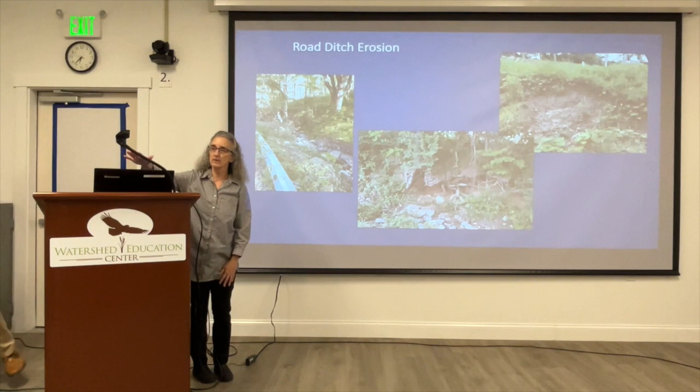So, yeah, put a camera here. Can you see me? I'm so short, so I don't want to stand there. You're like, yeah, who is that? Well, actually, you would know who that was.

So this is a road ditch erosion, and this actually is connected to a grant that we have put in. It's about almost $1 million, and it's going to service the towns of Conesus and Sparta and the town of Geneseo. And the reason it's up here is more for the fact that we have this kind of erosion along our roadsides, but it's nice to be able to pair it with something that we can do. One of the reasons why we can do something here is because it's affecting public infrastructure.

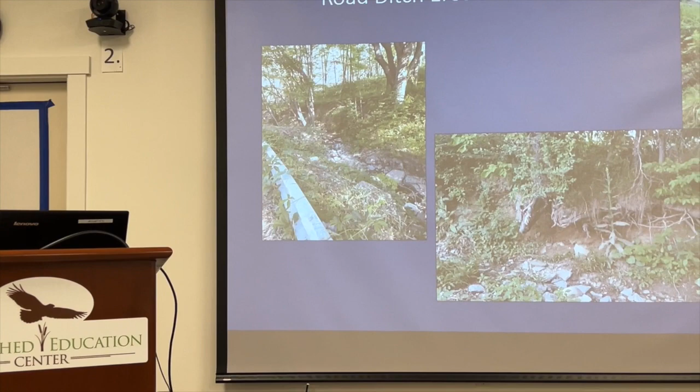So our WQIP grant, which is water quality improvement grants, is connected to stabilization of, in this case, town infrastructure, which is town roads. So in the town of Conesus here, Joy Road, and the town of Sparta, this is Story Road, and in the town of Geneseo, this is Long Point. And you can see we've got road impacts. These are all road ditches. So we're looking forward to getting into that grant 2023 to 2024. Thank you, Mary.

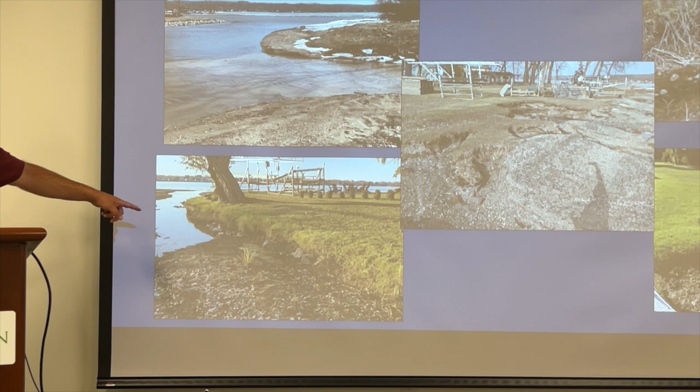So here's great examples of some stream bank and shoreline erosion. This is a property on, is it North McMillan? It's not. Is it North McMillan? To be honest with you, I'm cheating in the middle of the screen. I don't remember. I think that's what it is. So this property is just washing away. It's at the mouth of the creek. Anytime there's a large storm, it just washes more.

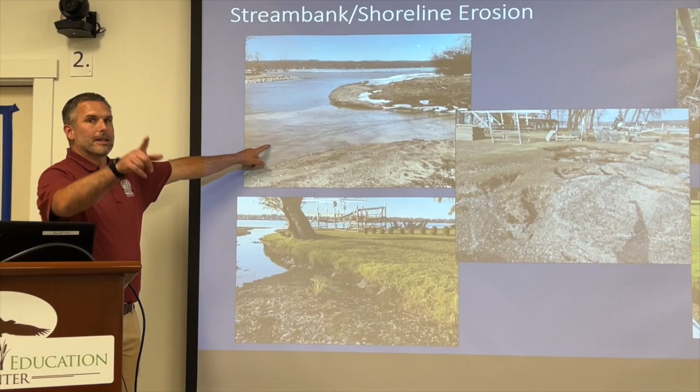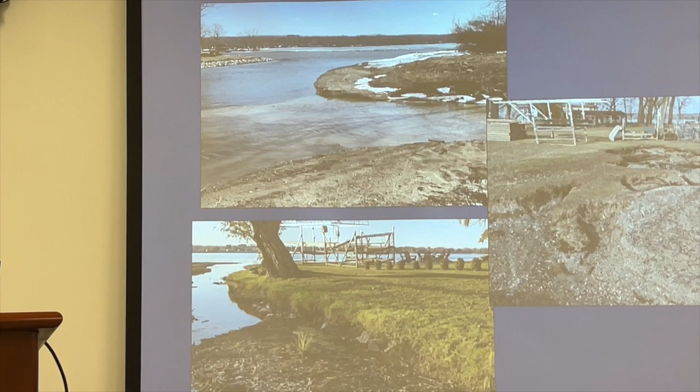This is a really good example of what tree roots do. It might not be super easy to see, but it's holding all of this land together. This is right over here at Hannah's Creek. There's a large deposition of sediment that goes along the outlet that's going to need to get removed at some point. This is down on Long Point, to the south of Long Point Creek. When we had those big floods, the water just swirled and washed away all the waterfront.

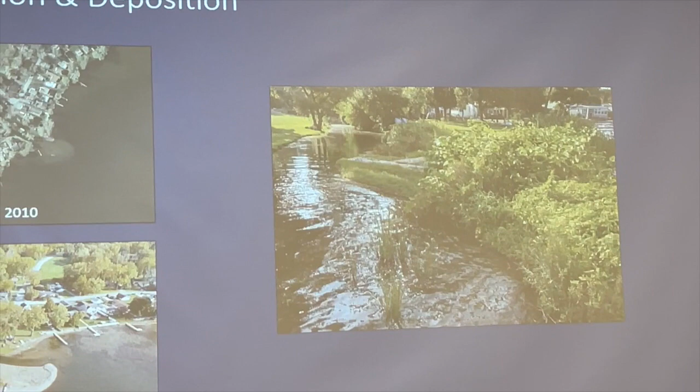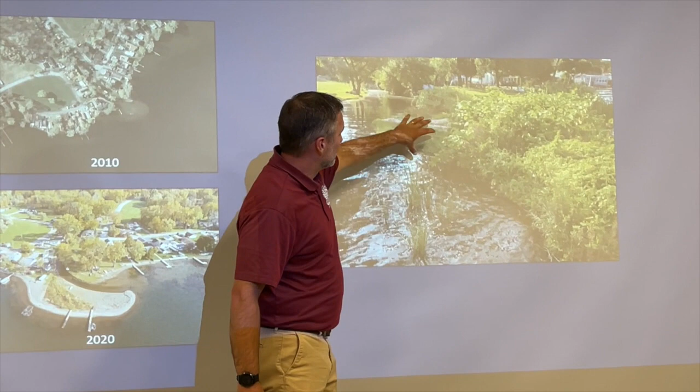And then that's another example in the upper right of some stream bank erosion. The homeowner's land is just being cut away. Here's some really good aerials of what happens with all that sediment being deposited. So down here, it's being deposited at the end, and so these folks over here are starting to lose what they have of a shoreline, and other people are gaining. Same thing up there. This land didn't used to be there, and now all that sediment is being deposited. Plants are growing up on it, and it's just gonna stay there and cause issues for the folks on the other side.

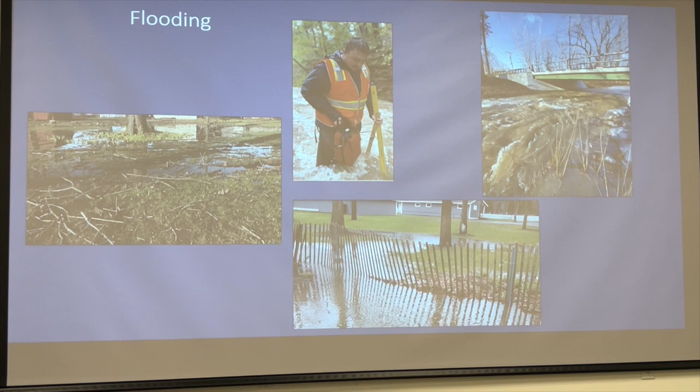And then here's some photos of flooding out on Long Point Park. And that's a SUNY Brockport student doing a stream flow study on North McMillan Creek, which is up there in the upper right-hand photo as well. So like I said, all these are caused by natural events. Most of them, I guess, some could be caused by humans. I don't have any great answers. I can just pass along resources to folks. And this is where Megan comes in and can tell us about what we can do.

So again, thank you for having me. My name is Megan Webster. Mary already introduced me to you. Just another bit, as I mentioned, I grew up on Cuba Lake and witnessed a lot of the things that you see on Conesus Lake as well, firsthand growing up, and now in my role as a district manager for soil and water. A lot of the projects we do are dealing with stream banks and shorelines and how we look at making them more stable and robust for our future.

So I know that you all are, since you're here, very aware of our changing weather patterns and our increase in weather events.

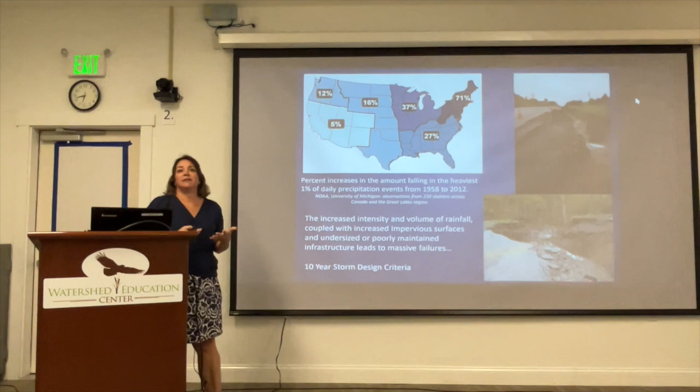And if I move that, is that going to be problematic? It's fine. Okay, great. I'm going to move in front here. It's just easier.

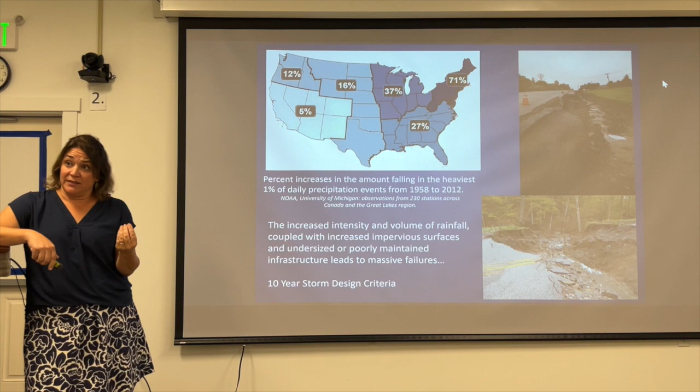So, as you see from the chart here, we are increasingly seeing more water coming at more concentrated events. And so these are more intense storms occurring over a shorter period of time, a lot more water being seen. When I go out to a site visit, the number one thing I hear is, it never used to be like this, okay? And that is, in the cyclical way, somewhat true.

We are exiting about a 10 to 20 year drought. And so we're moving out of that drought cycle into more water. In addition, we're seeing the changes of climate where an increased temperature in our atmosphere allows more water to be held in the atmosphere, right? So more water up in our atmosphere then is able to condense and fall down in much greater volumes in

shorter periods of time. And the days of maybe a light, gentle rain for 6 hours over the day doesn't happen anymore, right? It comes in very short bursts, very intense amounts of water over short periods of time. And your neighbor down the road 2 miles away might not see any rain, and you've gotten 2 inches. And so this is something we're seeing across the board throughout our region.

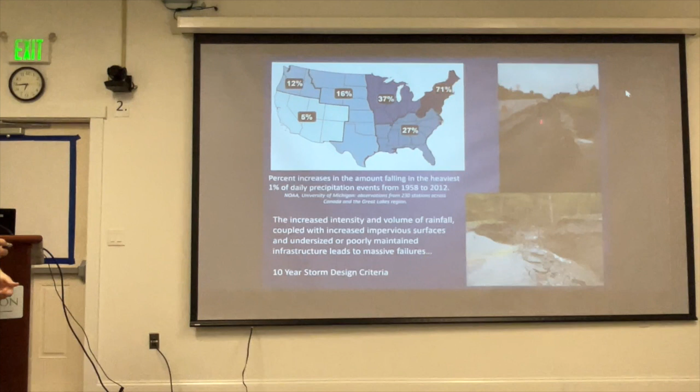And you can see here, just a few examples of when major rainstorms happen, the washouts that occur, whether it's along a roadside or this is a blown out culvert that then took the road with it. And as I mentioned, the increased intensity and volume of that rainfall really has very dramatic impacts on our infrastructure, especially with undersized or poorly maintained infrastructure. So it's something that we have to deal with.

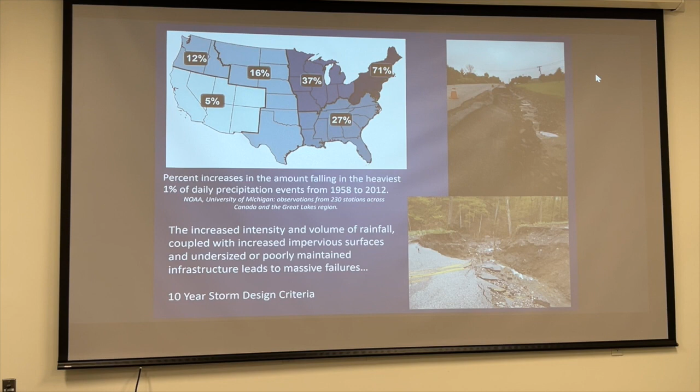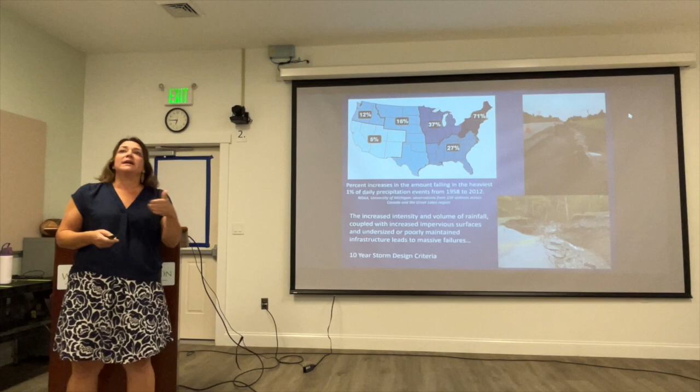Most of our public infrastructure is designed for a 10-year storm, okay? A 10-year storm, just to put it in perspective, is around 2 inches over a 24-hour period of time. When they say a 10-year storm, it's a probability thing, right? It doesn't mean that if you've had your one 10-year storm, you're not gonna have another 10-year storm for another 10 years, unfortunately, because over the past summer, we've had about four 10-year storms, okay? So it's just a gauge for us to give an idea about the amount of rain that we're dealing with over that period of time. And it's something that we use as a metric.

This is recently, obviously you might have seen this in the paper, the storm on July 8th. This is the town of Canandaigua that experienced a 1,000-year storm. We had 5.5 inches in 2 hours in the Canandaigua area. And obviously it led to massive flooding. We had over 100 homes damaged in Ontario County, and it was a very localized storm.

And in that region, we've had about 17 inches over a month period. So, it was already saturated soil, and then having this amount of rainfall come in behind it, there's no way that our public infrastructure is built to handle this type of thing.

So, we all know the consequences of these massive runoff events, or when infrastructure fails, or just general movement of soils through our system. Those soils and sediment and pollutants have a lot of impacts on our local waterways. And it's very, very difficult to clean dirty water. Okay, it's better to control it at the source so those pollutants and nutrients aren't entering our waterways. Once they're there, very difficult to clean. Very expensive to clean. So what we want to do is really focus on the sources of those pollutants and see how we can really control those.

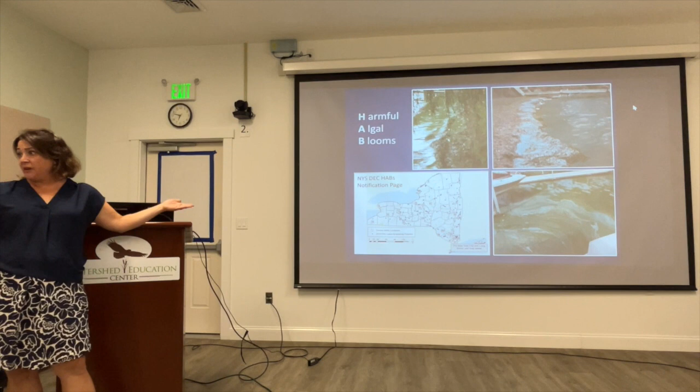You're, I'm sure, all aware of the postings page for harmful algal blooms. I know there's postings through Livingston County as well, so I'll leave that to Mary to share those resources later.

But I'd like to share with you, we are all part of the solution. So it's not just one area of society that is able to control this problem or solve this problem. It's not just agriculture, it's not just construction, it's not just homeowners. We are all part of this situation. We're living in a built environment, and as humans, we manipulate our area around us, right? So how can we do that for the positive and have positive effects that will help us live in the way that we're accustomed to?

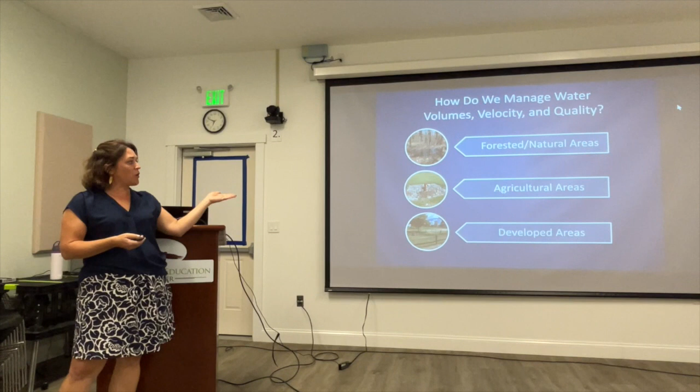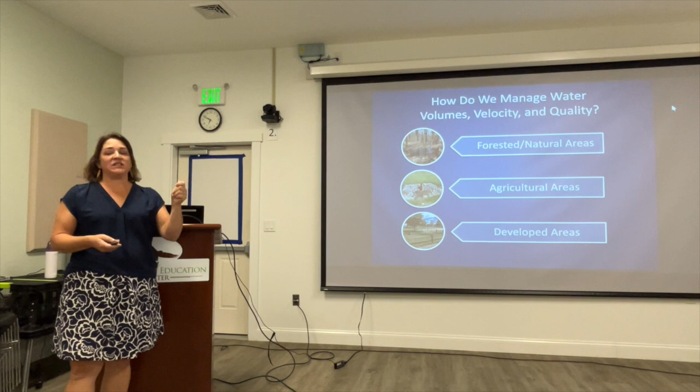So a lot of what we talk about is managing, as we talked about, water. Really, it's the energy of water, the volume of water, the velocity of water, the amount of material that it can bring with it that we need to control. And that takes different forms in different places. So in forested natural areas, in agricultural areas, in developed areas, there are best management practices for all of those solutions. So I might use the word BMP, and that stands for best management practice, okay? And it's just the tool in the toolbox.

The main thing that we need to do is to build a better sponge. So think about that conceptually: we want to be able to retain as much water as possible, have that water filter into our soils using the natural processes, using natural hydrology, natural systems. Retention, infiltration, treatment. Those are the main things about how we're going to deal with these volumes of water and how we're going to treat any contaminated water that's in our system.

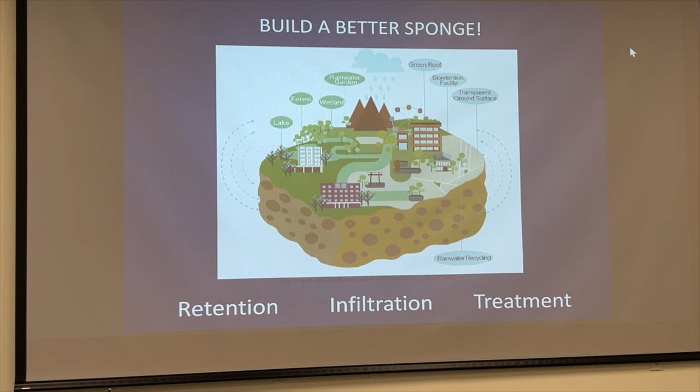So I'm going to really focus on the streambanks and shorelines because I know that's what you all came today for, but I'll also mention a few other things, and if you're interested, we can follow up later or in the future. But some of the things that we've done as a district is we've put in vernal pools, which are small ephemeral pools that are 18 inches in depth. They're not meant to be a year-round pond, again, as vernal meaning spring. It's just a temporary pool that captures water.

Upland water retention, the WASCOB word means water and sediment control basins, right? So a water and sediment control basin is just an area where water is detained for a period of time and then let out slowly. And it provides that treatment and also slows down that velocity of water. If you drive by a farmer's field and see those orange pipes sticking up in the field, that's a Hickenbottom pipe, and that is an inlet, usually associated with a water control structure, right? So they're used across the board through agriculture, through private lands, these water and sediment control basins. I'll talk a bit about prefabricated sediment traps, and obviously we're going to go into some restoration projects.

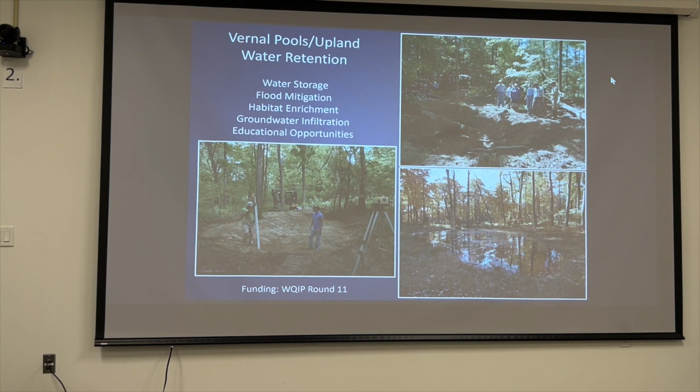So this is just a quick look again, as I mentioned, at creating vernal pools. The benefit of putting in vernal pools is water storage and flood mitigation for sure, but it also has a habitat enrichment component to it. These pools that we've put in with a grant through WQIP funding are teeming with life, whether that be invertebrates, and our local flora and fauna love these small pools. It also allows the groundwater to filter in slowly, and that's really what we're looking at.

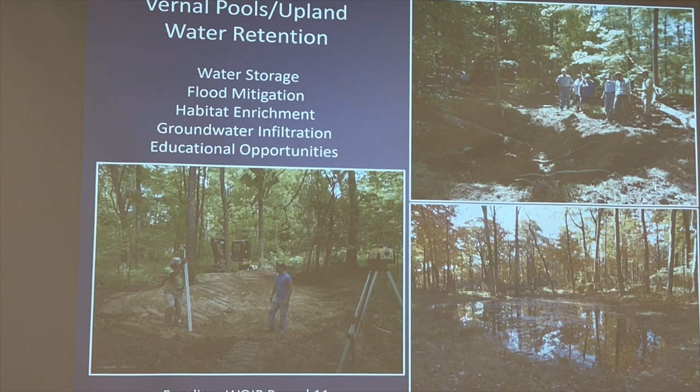If you think about a natural way a vernal pool is formed, think about a large tree with a big root base that tips over in the woods. That big scour pool that's left by that tree root base, that's a natural vernal pool. Okay, so just conceptualizing that depth that you're looking at, around 18 inches of depth.

In forest situations, we deal a lot as humans. We need infrastructure such as roadways. And how do we get from one place to another? And so we look at rural roads. In our areas here, whether you're living in a rural area or you're accessing gravel driveways, that type of thing, road crossings are always a big thing. How do you deal with your road?

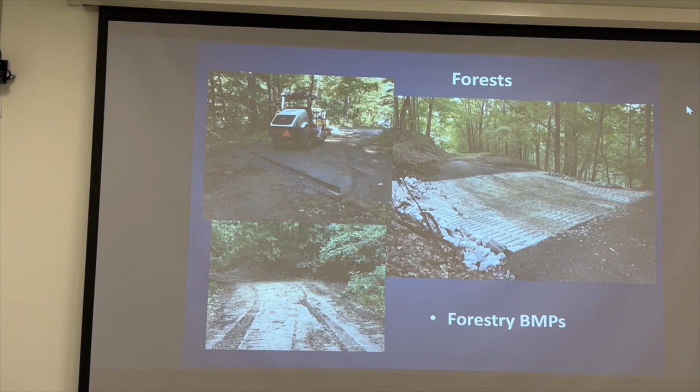So these right here are 3 examples that we put in at a local DEC land just above Honeoye Lake. I'm not sure if we can change the lighting, but if you can see here, there's basically a rubber conveyor belt that's sandwiched between two 2x4s, okay? And what this is doing is as the water comes down the road here, it's hitting this conveyor belt and then sloshing off to the side. So that rubber conveyor belt is placed at a 45-degree angle.

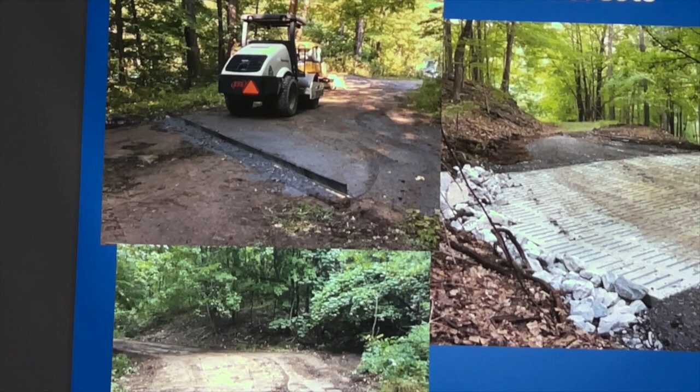So it's at a 45-degree angle, and it's directing that water off of the road. Again, we're breaking up the water, breaking up that velocity and the amount of water. When we shorten the amount of water we're dealing with, the flow path that we're dealing with, and the volume of water that we're dealing with, we take that energy out. And so we don't give it that chance to be erosive. So this is one example here, and then it's gravel packed in either side.

This is something that's very, very inexpensive to do, and it can be put in, you know, right up the hill. Town of Canadice, right across from Joe Bear Road. If you look up the hill, they did their water tower installation. Look up the road and you can see these lining up the whole road. The main thing again is to keep that at a 45-degree angle, and you're shunting the water off into some type of stabilized area. But based on the flow path, you really shouldn't be dealing with too much water there.

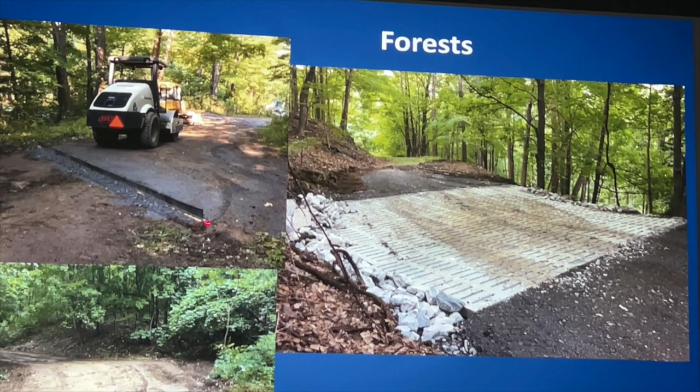These are actually cattle slats, so this is used in farming often. Upslope of that area is a stream drainage area coming down through, and it usually crossed this road here and led to a lot of scouring. So we used this, we call riprap, this large limestone rock, and we have this cattle grid here, and the water is able to flow through and over and provide a stable surface for that water to flow over. So the idea is you're either redirecting water or giving it a stable surface, breaking up that flow pattern.

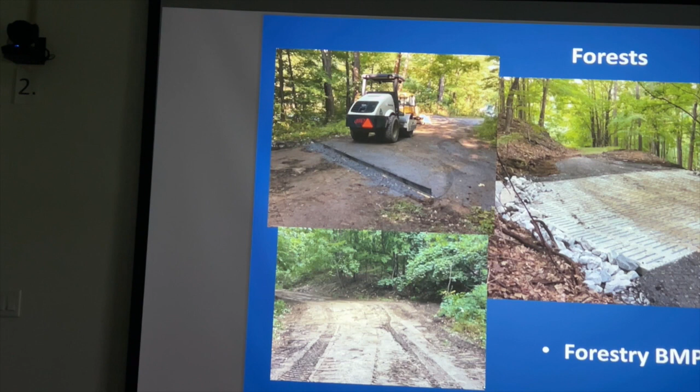Right here, this is something when you are undergoing construction that you can implement. This is what we call a rolling water bar. This is just a bump in the road that's directing the water off to the side. So again, breaking up that flow pattern. In construction areas, if it's not a road system, you'd vegetate that. In a road system, it's just gravelled, but just a way again to break up the water.

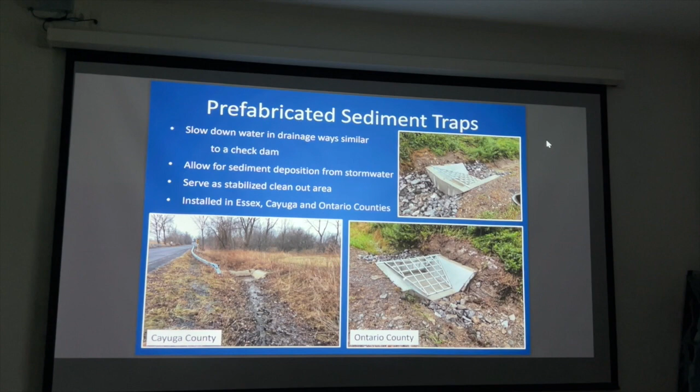This is what I mentioned is prefabricated sediment traps. These were something that we used in road ditches in Cayuga County and Ontario County. This allows sediment to be trapped in this area, and then it's specifically engineered so a ditching bucket on an excavator can come in and ditch that out, or we can use a vacuum cleaner to clean out that sediment. There are small leak holes in here that are allowing the water to slowly sink through and filter out and continue on down that drainage ditch.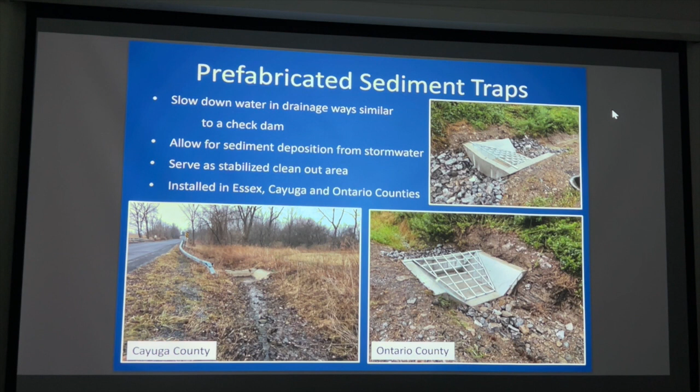But it gives you a maintenance point. And the main thing for all of these structures I need you to remember is there's usually a maintenance component, and that is very important. You can't put these structures in and walk away. There's usually some type of maintenance that is needed. So these are some prefabricated sediment traps. And again, that's along County Road 36 in Honeoye.

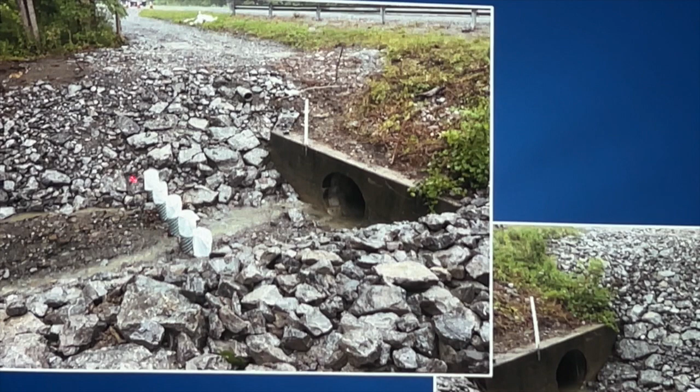Similarly, these are debris guards. We know that we have a lot of dead ash we're dealing with, right? If you're a homeowner and have ash trees in your yard, they're most likely skeletons at the moment. And all of that dead woody debris is gonna end up somewhere, and oftentimes it's gonna end up in our stream systems. What this is right here, this is a debris guard that's catching that woody debris.

And what that's doing is allowing an access point for clean out. And again, it must be maintained and cleaned out. Because if that tree then is blocking this area here, it leads back to that first slide I showed you, which is water coming up over the road or blowing out the entire road.

Yeah? So for something like a debris guard, would that work, let's say some homeowners are adjacent to a culvert like that, or maybe, oh my gosh, I forgot the name of it.

Not the slough, but when you come into a narrow brick wall, you know what I'm talking about. I'm sorry, I'm not sure. Oh, you know what I'm talking about. This is so crazy, I've forgotten the word for it, but when you're out at the lake and you have a narrow slough with water that goes through. So what I would say is I have not permitted this in. Well, this is a stream, so yes, we've permitted this in streams.

So I-beams or this type of thing, obviously it's a permitting process if you're putting in this long-term structure. And this area right here was built so that you can access and come down and scoop out and clean it out. So it is very site-specific if you are going to be able to have access to that point for maintenance, for long-term control. So that still might be a municipal feature, not necessarily a landowner feature? I've had them installed in landowner features as well.

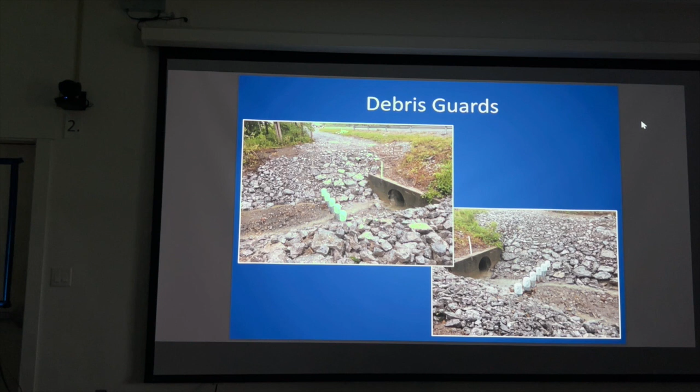Can you use this for ice jamming? Or can it break up ice in some way? Or is there another feature? I'm not sure. I'd have to think about that. I haven't looked at it for that. Okay.

Yeah. I've talked a little bit about stream systems here, and the natural channels of streams utilize floodplains, right? You've all heard the term floodplains and understand that is an area where, when the water rises, the water can spread out into the floodplain area, and that dissipates a lot of the energy of the stream, and it gives it an opportunity to drop out some energy, drop out some material, and then when floodwaters recede, it comes back to its center channel. So I just wanted to mention floodplains first as we're moving forward.

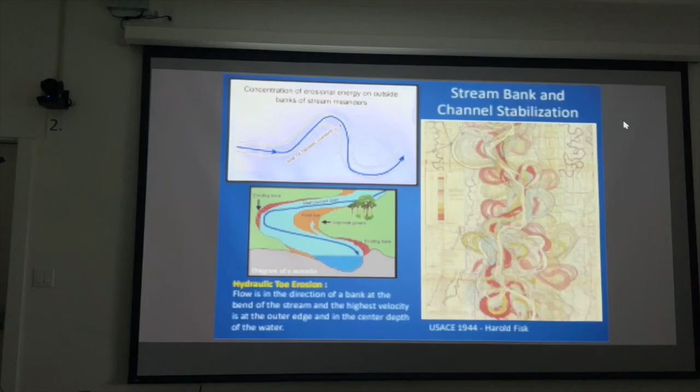It is very important because floodplains serve a major purpose in stream systems, and they're really critical to have in our stream systems. I'm going to start first with this picture on the right. This is one of my favorite photos, and it's actually not a photo. It's beautiful artwork that was created by the Army Corps of Engineers, Harold Fisk, in 1944, a cartographer who mapped out the drainage patterns of the Mississippi River. And it's this beautiful overlay that shows you how the Mississippi has traveled over time.

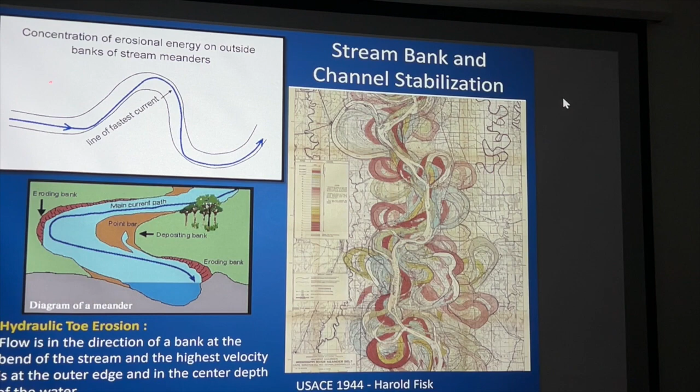And you can really see here, streams do not like to be straight. They like to have a sinuosity, a curved pattern to them. And they are always going for that sinuosity based on a whole bunch of factors, elevation and grade and all this kind of stuff. But basically, the energy of a stream as it hits an area will bounce off and erode here and then come back around. So it forms point bars, you have an eroding bank and a point bar. This is the natural channel formation of streams. That's how things like oxbow lakes are formed, right? Have you all heard of that before? This isn't too new a topic for you.

So this is one of those things when we're talking about stream bank stabilization that we need to think about. Where is the erosion happening? Why is it happening? If we stabilize one area, what's going to happen to the other area? Okay? Whenever we are looking at the eroding stream bank here, are we redirecting the energy or are we just stabilizing that bank, right? And so those are some things we need to think about as we're designing these projects.

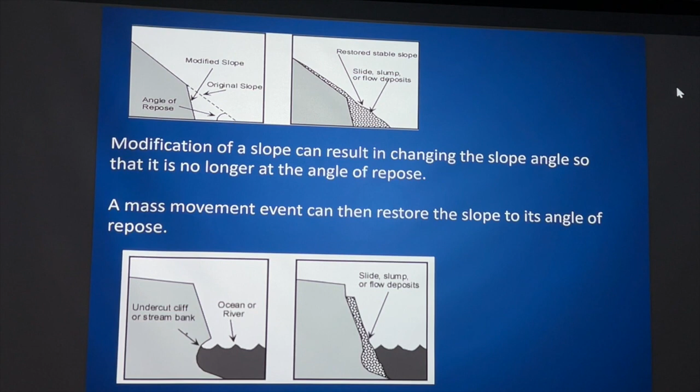Because I know you're concerned about erosion, one of the things I want to talk about is the main area of concern in streams is the toe. So anytime this toe right here is eroded, it changes that angle of repose and it causes a lot of undercutting, and then the bank wants to slough. This is the most critical area of any stream, is that toe of the slope.

If you want to stabilize a stream bank, unless it's getting massive amounts of water flow from the top, creating issues, your main concern is your energy coming at that toe of the slope in the stream. Yeah, and that's how you stabilize your stream. That's where you need to focus your energy. You might come back in and do work to pull this slope back and vegetate and stabilize, but your main stabilization of the stream happens from the toe.

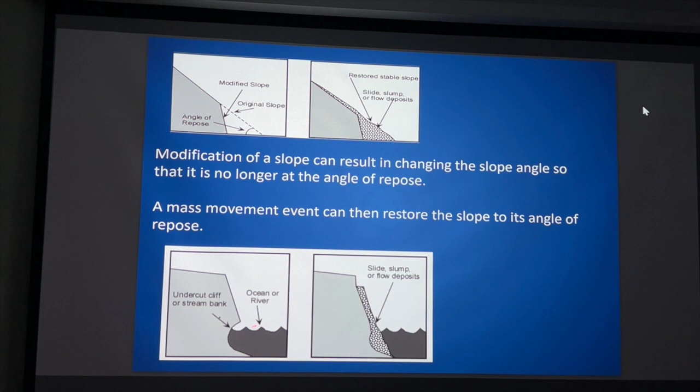So this is just an example right here, right? So this is an area where it is cutting along that toe and the bank is sloughing off, and all that sloughed off material is entering that stream system and being carried downstream. And it's depositing somewhere. Streams want to create an equilibrium. And then the homeowner here has a lot to deal with, right? It's a crazy situation, but it's trying to get back to the stream stasis here.

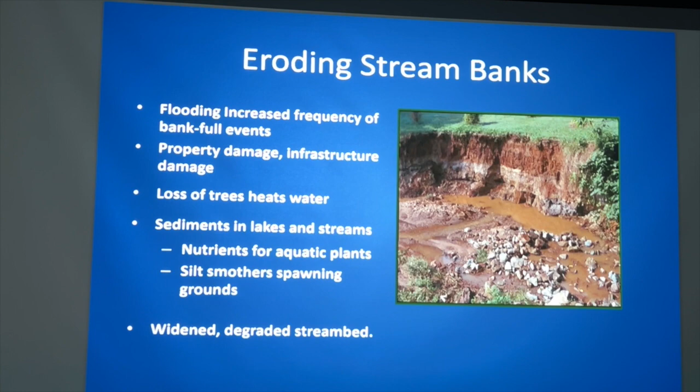So, as we talked about with the volume and velocity of water moving through an area changing, that puts a lot more pressure on our stream banks and causes a lot more erosion. And as we have die-off of tree species like ash and hemlocks through the hemlock woolly adelgid, our critical riparian areas are becoming deforested. And really, as the picture that was shown earlier, those root systems are really holding things in place.

Trees do so much to streams. They help regulate water. They help the water temperature. They help keep the stream bank itself in place. A whole bunch of stuff. So when we have eroded stream banks, it creates a lot of issues. So what can homeowners do? And this is what we wanted to talk about today. Critical thing is maintaining vegetation.

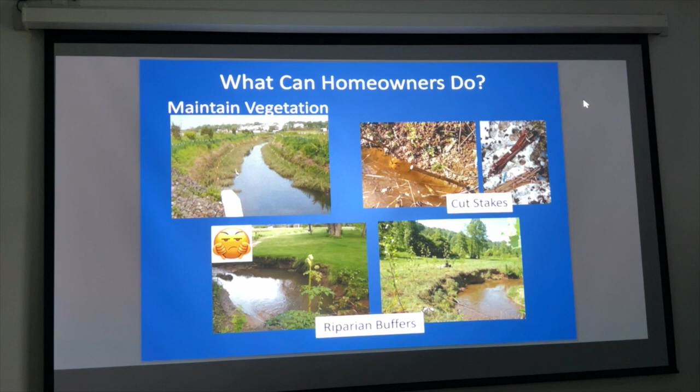Okay, anytime that you are able to keep a vegetated slope, both the area which deals with overland water flow and also the toe of that slope, any vegetation, that root structure is critical. I didn't include it on this slide, but there are fabulous pictures through the Cornell Soil Health Initiative that show the plant above the ground and then the root system below the ground. And it's amazing that you have a third up top and 2/3 of root structure down below. And that is performing a critical function of holding things in place. So any vegetation is good vegetation.

We work a lot with homeowners who might not have a lot of money to put towards these projects. And one of the things that we often recommend is cut stakes. These are live cuttings from trees that will then sprout out and create new trees in the area. And so two things that we often use are Streamco willow and red osier dogwood, which are both commonly found in the area. If you want to know more about cut stakes, I just did a recent article in our newsletter in the spring about how to do cut stakes. And so I'll tell you more later about how to access our website to get information there, about how to basically improve and increase vegetation in your area for low money.

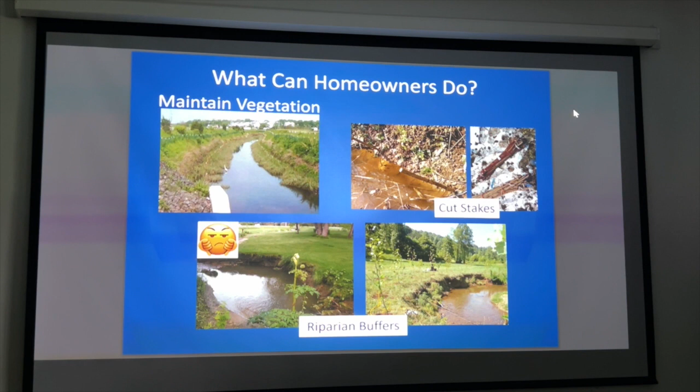And then keeping a good buffer. So when you mow right up to your edge here, you're not helping out your stream very well. If you can keep a more vegetated buffer, grow some trees, some root structure there, you're helping lock that area into place. There's a lot of techniques for stream stabilization that are used. Some involve rock, some involve natural structures.

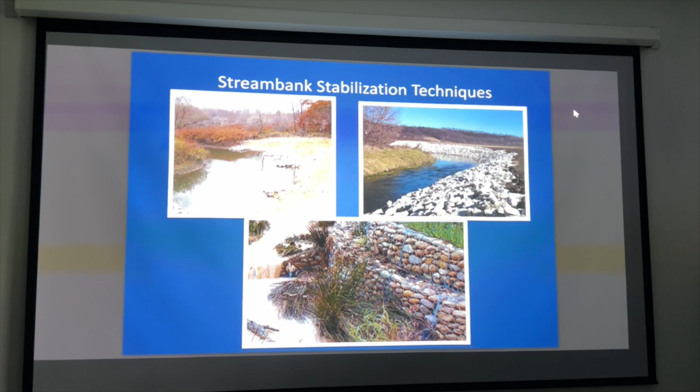So again, what we want to do here is really protect the toe of the slope. And anytime we're doing any project, we're what we call keying it in, going down below the grade of the stream bed here and going down deeper to really embed the structure low so that you don't have water undercutting and coming around your structure.

These are some uses of these live stakes, or this is actually wattle, but this is like red osier dogwood that's just bundled. And if you're taking it in a time of dormancy in the spring or in the fall, when it comes back out of dormancy in the summer, it'll start to resprout and grow. So that's just a way, again, live stakes or wattles that can be used for stabilization.

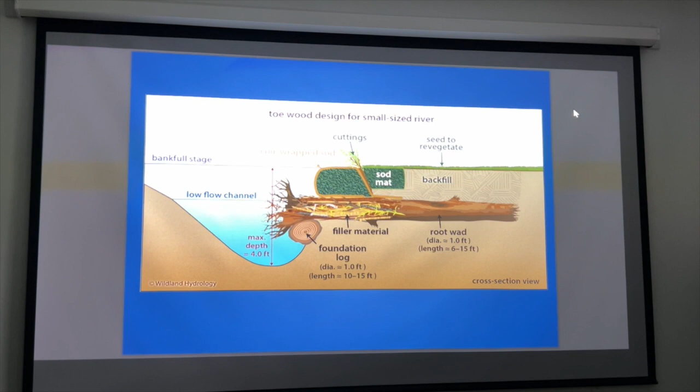So this is a quick example of toewood, because I'm going to go into some stream projects that we did. This is using natural channel design. So this is using natural materials rather than just rock to help stabilize the structure. And I'm just giving a quick schematic here. The main components here are a foundation log that's placed along the line of the stream. And then they have large trees with the root structure intact placed out on top of the foundation log.

And usually they're crisscrossed back and forth like this so that their root wads are then stuck out in the stream. And that gives some breakup of the velocity of the water. It also provides a lot of habitat. So we use them in trout streams quite often. And then we have some coir wrapped material on top, usually backfilled with soil and planted, and then put some tree structures in there. So that's the basic schematic of what a toewood structure looks like.

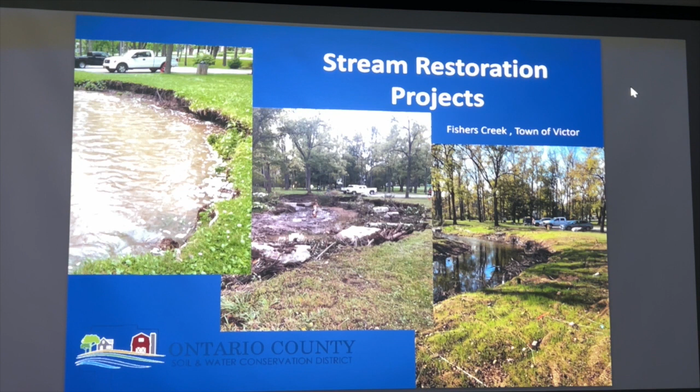This is an example of a project we did up in the town of Victor along a trout stream. So you can see here the eroded stream bank. And then you can see here the trees that were pinned in place with these rocks, but the root structures are then stuck out in the stream, and then it's backfilled on top with soil, and then that structure stays in place, right? So you have a nice grassy area for people to come up and fish off of, hopefully not get their lines too hooked up in the root wads, but it's a great structure. It provides both stream stabilization and also habitat for the trout, since Fisher's Creek is a trout stream.

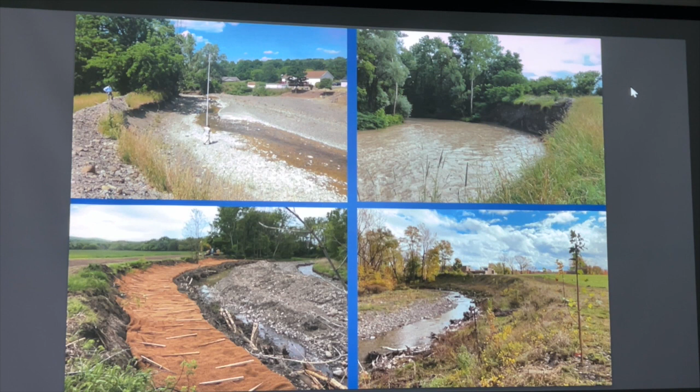The question I always get is, will it hold up? This is a project we did in the town of Naples with the village of Naples, and I got a lot of pushback from this. There was a large flooding event that happened, and the stream broke through this area here and went into the adjacent field, and we suggested this natural channel design toewood structure to stabilize the area, and we got a lot of pushback with it will never hold, it's not going to last.

And you can see after we put in the structure, we had a huge amount of ice come through. See all of this ice that's laying around here, flooding coming up over, as we intended, utilizing the floodplain to the north of the project, and it held very well, I will say, and continues to this day. Actually now there's a lot more trees growing up in there. So holding really well. It does hold up to large water volumes, ice jams, that type of thing.

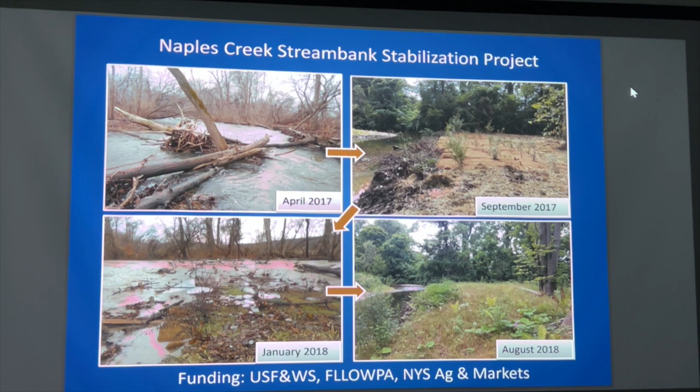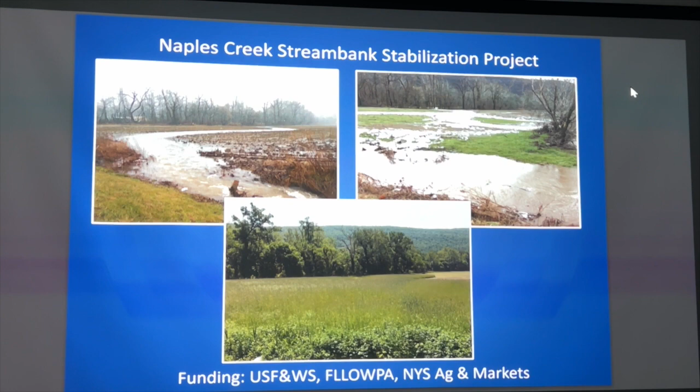So this is just from a different angle showing you, this is the area where it broke through, this is after stabilization, this is going out and utilizing that overflow floodplain area that we had established, and then this is just in the spring after that water went back down, holding still in place. And if you follow the Naples Trout Derby, they pull big trout out of there every year, so fishermen are certainly happy. And this is the adjacent floodplain area. So we gave an area for that water to access as it does come up and go over. Having access for floodwaters is very important in systems.

So I'm gonna pivot here to what our shorelines are up against.

As you all know, we have large storm events, high velocities of water, the ice, the wind, the waves. There's a whole bunch of adjacent land uses like homes. We've obviously had a decrease in wetlands as we become a more built environment. We talked about invasive species already, the hemlock woolly adelgid, Japanese knotweed, etc. Every time we straighten a channel and we lose those meanders in our stream, or we constrict a channel and reduce the floodplain access, that's always a problem.

Streams do not like to run straight. I'll just mention that again. Streams also do not like to turn right angles, okay? And streams also do not like to be put into pipes. Every time you put water into a pipe, you increase the velocity of that water, okay? So there are a lot of things that water does not like to do that as humans we try to get it to do. And that has a lot of implications for us.

Obviously, as we talked about, upstream activity, the soil type of the shorelines, and waterways are naturally constantly changing and evolving. And then also the narrowing of waterways with development, as I said, that constriction of the floodplain. So, as we talk about here often when we are in lake situations, these alluvial fan depositions, right? So we deal in our beautiful Finger Lake area here with pretty steep sloped areas, shale-based systems that come down into a flattened out lake area.

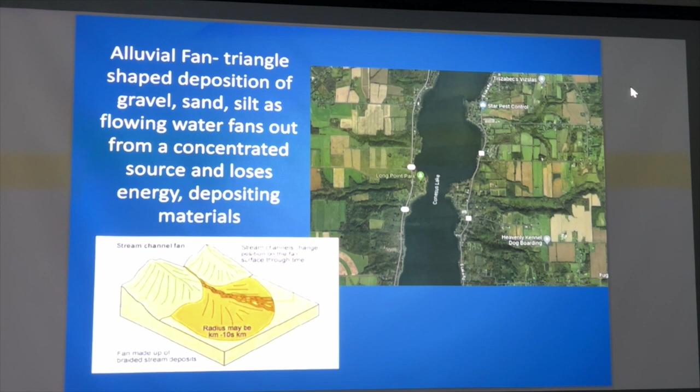And this is a naturally occurring thing, this alluvial fan, this deposition of shale that occurs. And you can see here the deposition that is occurring naturally. You can see these stream systems coming down through, and they drop out, and then the fan is created, right? So this is something that we've understood and built on and lived with throughout the years. So as I mentioned before, anytime that stream loses energy, it's going to drop out its materials. So these alluvial fans are formed over thousands and thousands of years, right? And through that time, that stream channel has migrated throughout that area.

Now we are often confining our waterways to very narrow channels. And so that water is used to dropping out material and moving through that system. And so it doesn't necessarily like to be confined. And so that's what oftentimes we're dealing with, and how do we deal with that, right? And I think that's one of the questions that folks have here today.

As I mentioned already, trying to direct water is difficult. Any changes to structures, any changes like culverts, bridges, they can change that water velocity and also impede flow or catch debris, as we've already talked about, right? And then also just a point is this shale material is transferred along the shoreline. It's a natural process, right? And this shale then migrates along the area.

How are we doing for time? I'm sorry, I don't see a clock. 7:13. Okay, great.

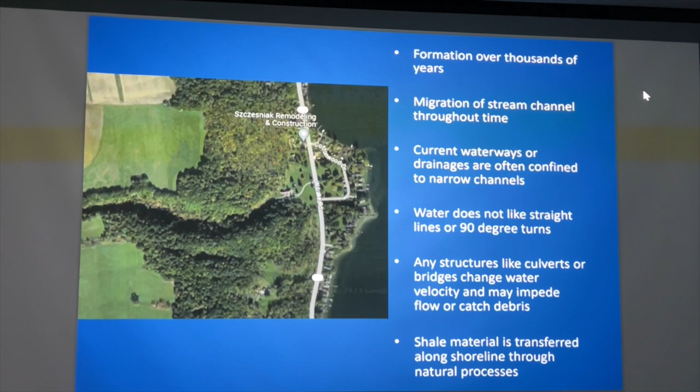So I'm just going to share a quick story because, as I said, I live on Keuka Lake, or grew up on Keuka Lake. My parents still live on Keuka Lake. Three houses down from us, there is a stream that comes out, and it deposits a large amount of shale there. Okay, and growing up, we had a nice shale beach, great for skipping stones and making all the piles of rocks we could. We had a new neighbor move in, and he had a cement seawall. And he decided that he would like to, in front of his seawall, kind of build a large seating area

for his deck chair. So he took his wheelbarrow down and systematically over the past 5 years has been taking buckets of that shale and building out this patio area in front of his seawall and lining it with rocks. Beautiful structure, great area for him to sit off. Totally not permitted what he's doing, not something the DEC would allow. And it also has dramatically changed the amount of shale that then populates my parents' beach.

Because that shale that was coming off that point and moving down naturally now does not come down. And so my parents' beach then has been basically taken away because of that large structure that's been placed out in the water. And it changes the movement of the water and where shale is being transferred to. So this is, again, these are natural processes, and then when we build structures, it changes the dynamics.

So when we're looking at shoreline stabilization, what do we look at? And it really does depend on a lot of different things. The main thing is how much energy that water has. So if you are in an area, a small pond, small lake situation where you have small waves, small fetch, which is the length of water, right? A short fetch versus we're in a very long fetch here, which is a long distance that wind can travel, water can travel. Gentle slope, sheltered coast, you can really deal with these green, softer techniques, yeah?

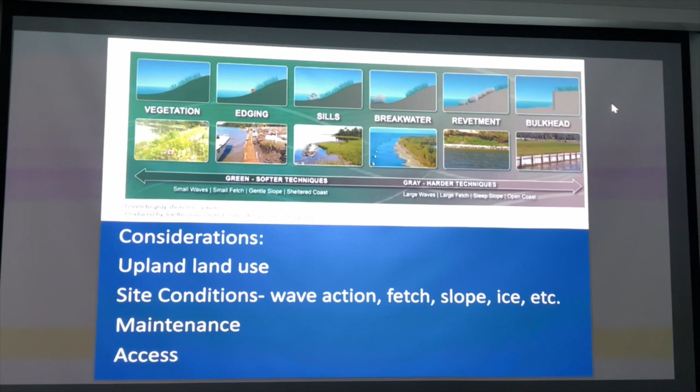But as we get more into, think, Lake Ontario or the ocean, large waves, large fetch, steep slope, open coastline, we tend to go with more hardened structures. And so these are all considerations when we're designing a project. What do we need to look at and what do we need to choose? DEC is certainly pushing that soft structure, natural shoreline, and it's something that I promote, but it's not always right for a place, right? So we need to figure out what's right for that specific location and what design works.

And again, just coming back to the point of maintenance and access, always maintenance. What structure are you putting in? What maintenance is required? Is it going to function over time? So, what's so bad about seawalls? As I said, DEC is not happy about seawalls. They're not permitting new seawalls. If you have a seawall right now, you're grandfathered in for that and can do work, but you're not allowed to extend the seawall into the water, right?

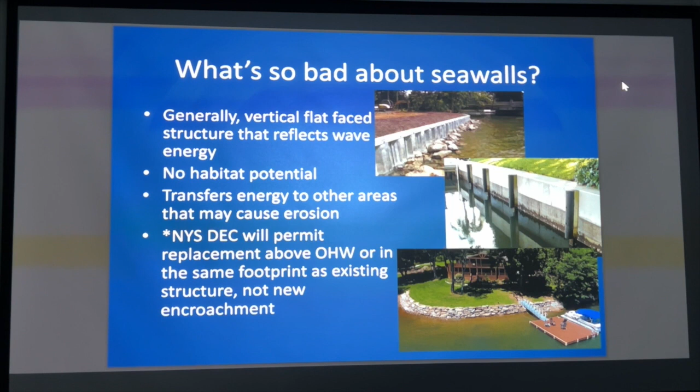The rationale behind why seawalls are not wanted is that generally they're a vertical flat face structure that reflects that wave energy. So when a wave hits it, that energy is reflected back off. There's no habitat potential whatsoever in a hardened structure like this. And then it can transfer that energy to other areas that can cause erosion. As we said, DEC will permit replacement above ordinary high water mark, OHW is ordinary high water mark, or in the same footprint as the existing structure, but not new encroachment.

So some resources if you're interested. There's a lot of stuff online about shoreline stabilization. New York Sea Grant has a lot of publications about shoreline stuff, so you can find out more information about them. I can let you know later if you want links to any of this, or you can just Google.

One of the things we talk about always is we're looking at projects, do you need a permit? And this is a call out to this amazing stormwater toolkit that you have here for Conesus Lake. And Mary has copies here on hand, and also there's the full publication online, and it's a great resource. So it's looking at what your activity is, what area of disturbance you're having, if your activity is in or adjacent to a wetland, if you are in a lake or a stream system, if it is a classified stream, if it's a Class C stream, it would be Army Corps of Engineers.

If it's a CT or above, which means a trout stream, then DEC has jurisdiction. So it can be complicated. And then obviously our lakes are all DEC jurisdiction. So the permitting side of things can be complicated. And the main thing is check your toolkit and ask. Ask DEC, ask Army Corps, ask Soil and Water, ask other resource providers. I'm not sure if Cooperative Extension does that here, so I won't throw you under the bus, but there's a lot of resources that you have to ask and find out what permits are needed, what's required.

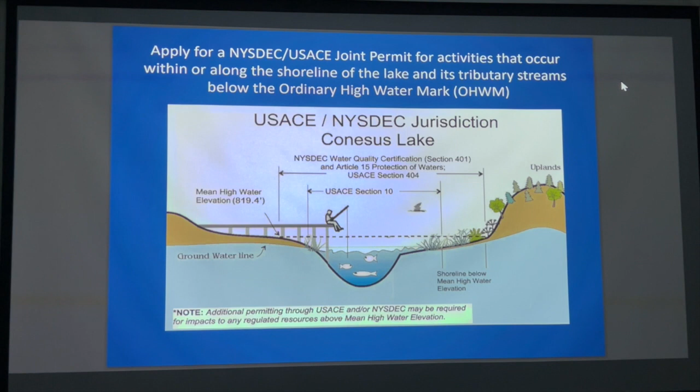And as long as I found you, one other question about the guards. A few series back, we were talking about the guards and maintaining. Is that like our storm drains? I guess West Lake Road on Conesus Lake is DOT. East Lake Road is a county or town road, or is it the homeowners? So this is a great question. One of the things is, where is that infrastructure put in? Is it within the right of way? Those are all questions before it's even proposed. Who's going to maintain this? That should be figured out, right? And if it's a private homeowner that installs it and then is required for maintenance, they would be the ones responsible for that. Does that answer your question?

Again, if you are planning a project and figuring out a long-term access and maintenance agreement, that's something that might be done, but really that needs to be established right at the beginning. Yeah. Thank you. And we can talk more. I'm happy to answer any questions or talk through things with folks. I just don't want to take up your time if you're not interested.

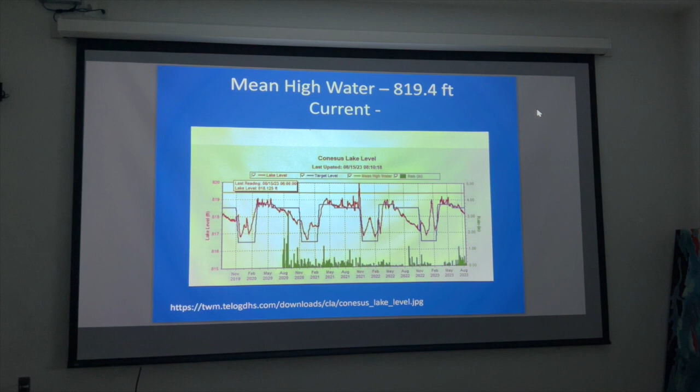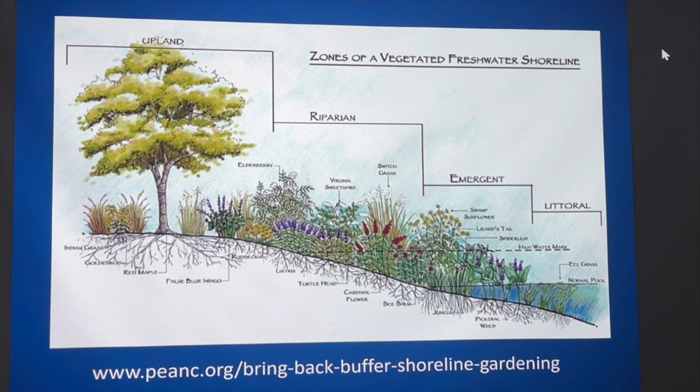We talked a lot about the riparian corridors and vegetated buffers, and basically, whether you're talking about a rain garden or a stream system, there are plants that really want wet feet and then going drier as you go, right? So you have to choose your plants appropriately, whether it's shoreline gardening or a rain garden or any situation, what plants are going to thrive best in that environment. And obviously we always promote local native plants.

So I wanted to talk quickly about a shoreline stabilization project that we did in the town of Richmond. This is at Sandy Bottom Park. It had an eroding bank here. What we did is we put in this shoreline stabilization project utilizing natural materials. Because this is at the direct north of the lake, with a long fetch of the lake, it's getting a lot of wind, wave and ice action.

So we installed boulders out front to break up that energy of the water, and then installed softer structures behind. We couldn't have just put those structures in. They would have been pounded by wave and ice and not survived, right? So that's what I mean by you have to choose what you're putting where and what you're designing. And where we had trees already there, we packed rock in around the root structures to protect that area, but obviously we didn't want to excavate around the tree roots that were there. We wanted to protect them.

And you can see the red osier, these are red osier dogwood cut stakes that we just jammed in there for some protection as well, and then a lot of different plantings along this coir log. I believe this gives you kind of like a schematic of what it looks like.

So the bottom one, there's a coir log, and then these are soil lifts. So it's basically like a burrito where we had coir fabric, soil, and then the fabric was rolled back on top, right? So it's filled soil lifts with this coir fabric. And then you can see here, we planted it out with native plantings. You can see here when it was establishing itself, it was growing really well.

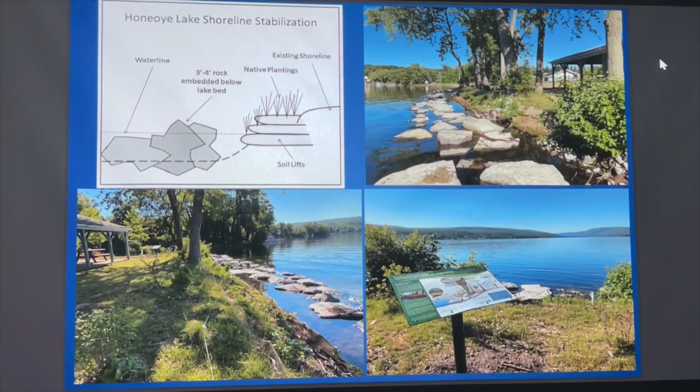We had a nice little sign that explained the project. Fabulous, fabulous. This is the sign that's there. You can go check it out. It's lovely, it's still there.

The problem was 2023. So, as you know, we had a huge amount of rain this spring. And there are a lot of issues with Honeoye Lake. One of them is the outlet and water moving out of the lake. And this area here was inundated with over 2 feet of water above the top for over a month, as well as that wave energy action. So that basically destroyed our project.

So the problem is that when you are designing and building a project, it's difficult to think about something that you're not anticipating, like full inundation of 2 feet of water for a month of time. Not something that we'd seen before. It was a very unique situation, and hopefully not something we'll see again, but a lot of shorelines are really deeply impacted by this.

I shouldn't say that. I just feel badly, it's not what I want it to look like. But that's what we find out, and lessons learned. One of the things I would have done is in those soil lifts, I would have fronted that soil lift with a coir log, right? And then put soil behind it, so that when the water went in through the mesh, it didn't pull the soil back out with it when it got that total inundation and high wave action through there.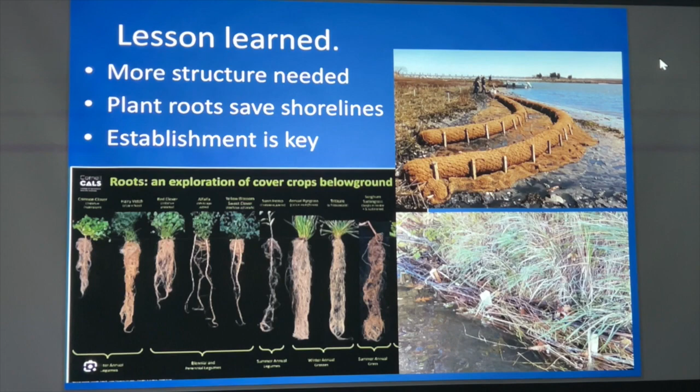So I'll just briefly go through here because whenever you're looking at developed areas, things like local laws are very important to protect steep slopes, whatever timber harvesting might go on, our short-term rental situation. We talked briefly about septic systems and sewer systems.

I know that you have ring sewer for the most part in the lake, but when we have especially large vacation rentals on shores that are on septic, for folks who usually would have a 4-bedroom house but then have 20 people packed in for a weekend, it very much overwhelms septic systems, and not just on the shoreline.

I tell my teenager this all the time, but hopefully he'll listen.

So it's something that you need to be aware of when you're looking at local laws and preventing septic system issues. And having an inspection program is very important, as we talked about.

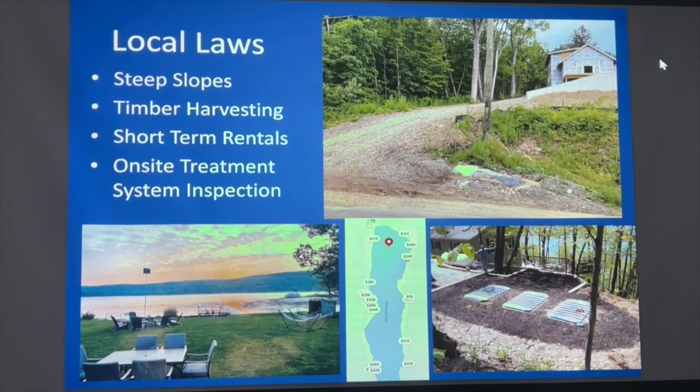So, did you want to talk in here?

So this is, okay, I think it's just one slide. So I just wanted to make mention of the fact that the towns of Conesus, Geneseo, and Groveland all have a specific erosion and sediment control law. Town of Livonia does not, but the model law was presented to all the municipalities, so it was really up to the boards to make the determination how they wanted to proceed.

I have to say, within the town of Livonia, there are other individual strategies within the law that help to address soil erosion, but they didn't adopt the full law itself. But what you'll see is where an erosion control permit is required or a plan is required, the threshold is lower than what you would encounter with the state. And Megan's next slide will talk about where the thresholds for this at the state level are.

So basically this just means that the towns of Conesus, Geneseo, and Groveland have more oversight into permitting in the plan. And your point person for that would be your code office. So we do have that extra layer of protection when it comes to land development. Great, yeah, thanks. So again, this is in your toolkit, more information, so you can find out more about this. I'll kind of go through this so we can get to questions, because I know I'm running a little bit over here.

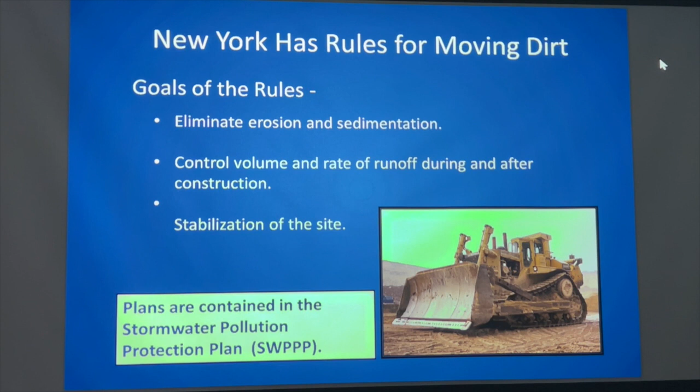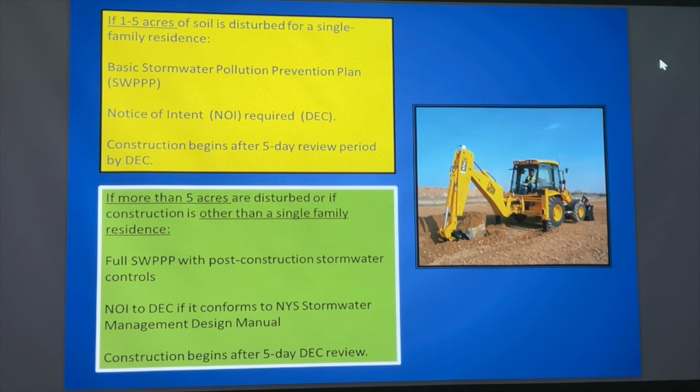But basically, the erosion sediment control plans are required for an acre or greater, or what your local law has established. And so anytime you're moving dirt and clearing a site, grading, grubbing, it requires a permit. And there is a stormwater pollution prevention plan that's required by DEC. There's a whole bunch of stuff for erosion sediment control. I won't go too far into it, but if you're interested, I'm happy to talk a lot about it.

For stormwater construction practices, the most important thing, again, is protecting any existing vegetation, clearing the site in sections, making sure you're following a phased plan so you don't have the whole site open if you don't have to, limiting the extent of exposure and duration, and following the stormwater prevention plan. For those of you who see active construction projects going on that are over an acre and would have required this permit, they always have a stormwater pollution prevention plan, a SWPPP, that should be on site and available.

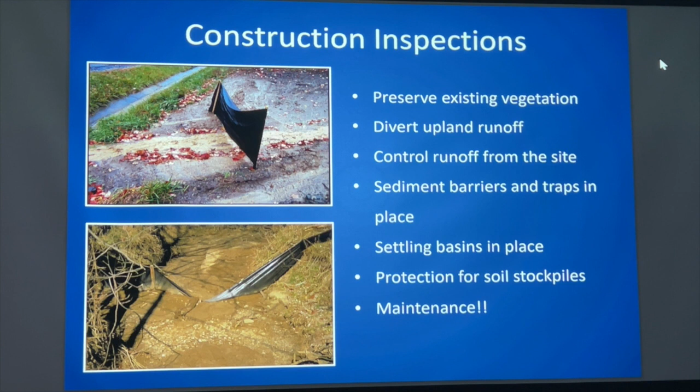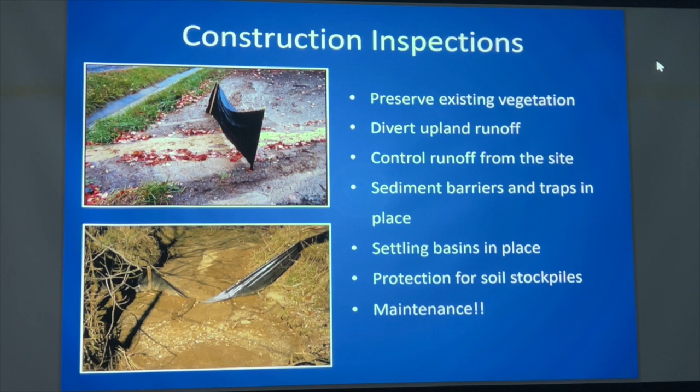So those SWPPPs have with them a required construction inspection by a certified inspector. So I perform them sometimes for towns. I'm a certified inspector. I'm sure your code enforcement officers or others are certified inspectors as well. Again, this is what you're looking for through a construction inspection. It really is critical when you're dealing with construction to maintain and protect your infrastructure and your existing natural habitat like your streams or wetland area.

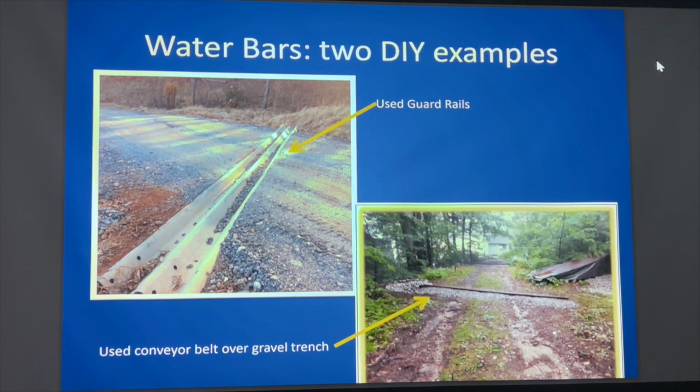And as we talk about how we build things, gently sloped driveways, making sure there's a crown to shift water off to the side. Any areas that you can have for infiltration, very important, right? And as we said, water's traveling down, then it hits the bottom. It's still got that velocity in it, and it's going to carry material with it.

We talked briefly about the on-site wastewater treatment inspection systems, I'm just going to call them septic inspections, because I can't speak right now. Really important to maintain your septic system and have it regularly pumped and inspected, especially enhanced treatment systems, which normally require a yearly inspection. Just a quick side note, we do this for the Canandaigua Lake watershed and throughout Ontario County. And in towns that did not have septic inspection requirements and then moved to septic inspection requirements upon property deed transfer, which is how most town codes have it, I will say anecdotally, probably a third to a half of those systems that were first inspected were failing or had some issues with them.

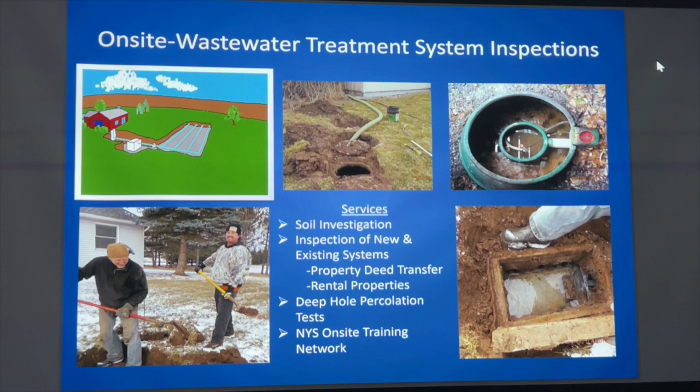And so you think of septic systems as not places that people want to place money. It's a lot of money required for a system that you don't see and think about until you really have to, but it's very important. I just was going to mention green infrastructure projects, and Mary has some examples. So again, focusing specifically on retention, infiltration, and treatment, whether that be through porous pavement or rain gardens. These are some local projects that Mary can now take over.

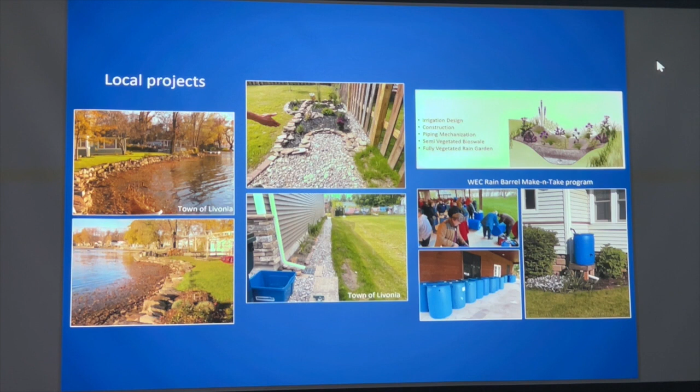Hey Don, I apologize, I left Don out of that process of the soil and erosion control laws, so the code officer is a point person, but so is Don. Oh, there you go. Yes, he's critical with Don, thorough implementation of it. But also, did you want to talk really briefly about the septic application process?

Or septic repair? Sure, yeah, there is a septic repair grant out there for properties where the septic systems are within 250 feet of a tributary to Conesus Lake. So those grants are available if you know anyone that has a failing system and needs financial assistance. Have them call our director. Does it fit the up to $10,000 with a 50-50 match? I believe so, yeah, that sounds right. Yeah, it's a significant assistance, so Don is your point person there.

For the local projects, we just wanted to give some credit to our folks within the watershed that are making an effort to help manage their stormwater on site, which cumulatively benefits the rest of us. For local projects, I'm pointing because I just don't use a pointer very much. But, all right, for local projects up here on the left-hand side, the town of Livonia, folks might recognize the Hudak properties. I believe they're 3 brothers. And so they've got the natural shoreline here that extends 3, even possibly 4 properties. They came together to put in that project.

It was done a number of years ago, but they divided the bill and it only cost them about $3,000 a piece. I know it would be more expensive now, but when you unite with your fellow landowners, something that's not doable for one might be doable if 2 or 3 others came together to do it. Plus the benefit is, if somebody does it on either side, it makes your project more stable.

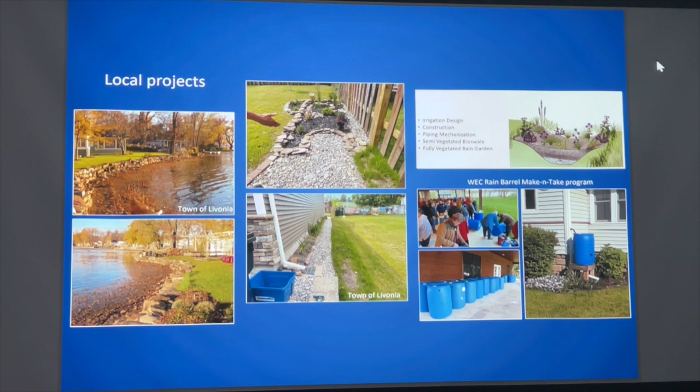All right, and I'm going to do this. The Conesus Lake Watershed Guide to Lake-Friendly Landscaping, that's on the back table. Help yourself to that. Inside that landscaping educational piece, there's information on installing a rain barrel, installing a natural shoreline, and installing a rain garden. These are all things that a landowner can do to help manage stormwater on their property. And then the local resources, basically this just gets you to the county webpage so that you can see all of the educational materials that we have available.

The town of Livonia is very active in greening. Right outside the door is a rain garden and rain barrel project. So you can see the picture on the left-hand side, 2018. And then by 2020, it became very robust. And down in the corner on the right, that's 2023. It just really has become a very healthy rain garden. And then the kiosk panels are going up. We have one right outside to educate landowners about what they can do on their own properties and match what the town of Livonia has done.

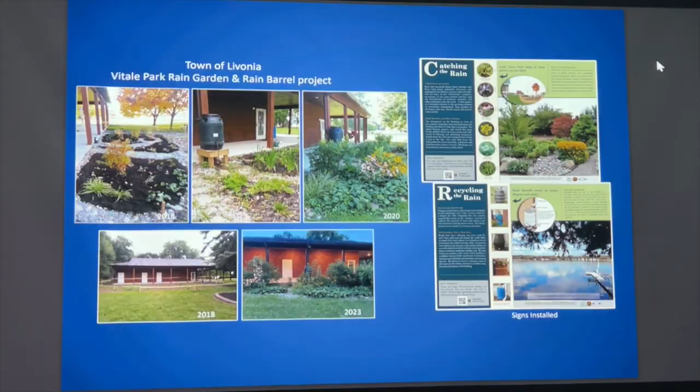And then for the natural shoreline, it's right out here, guys. It's a wonderful walk, and you can see some of the things that Megan has put into her projects. And you can see it right here in Livingston County. So the top left was before, the top right is after, and you can see some of the same features that Megan was talking about with the coir log and the reinforcement of the rock.

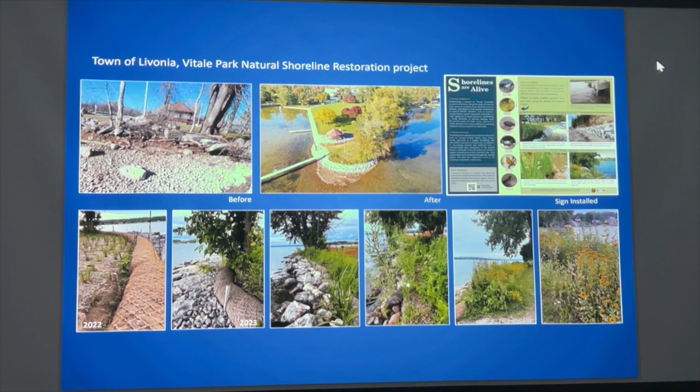And then it does wrap around the corner so you can take a quick look at what things you might be able to do on your property. And then if you go from 2022, there's our stakes and our plantings and our coir logs, and all the way up in 2023. And if anybody's interested in a volunteer project, let me know, because we've got an invasive weed that's gotten into the natural shoreline, and I need some help to get it out. Give me a call.

So I know I went through a lot of that really quickly. It's very bright now, but you're all awake, so went from being sleepy to okay.

So I'm happy to talk further about any specific projects or thoughts or questions you have. Anyone? Yeah. The stormwater toolkit talks about a silt fence. Are those effective against high velocity water? Silt fence is not meant. Silt fence is meant to catch silt. It shouldn't be placed in concentrated flows or across areas of water. New construction. Yeah. It's just meant as an erosion sediment control practice, not in a water situation. I guess there's temporary things that are used like turbidity curtains, but nothing that's permanent.

And then are those debris guards built on site? Yes, so basically you saw the galvanized pipe and then they poured concrete in them. I've seen it done with I-beams as well. You just need something that you're going to embed down into the ground and make sure that you have enough stability there to take all of the concentrated velocity of trees. So, yeah.